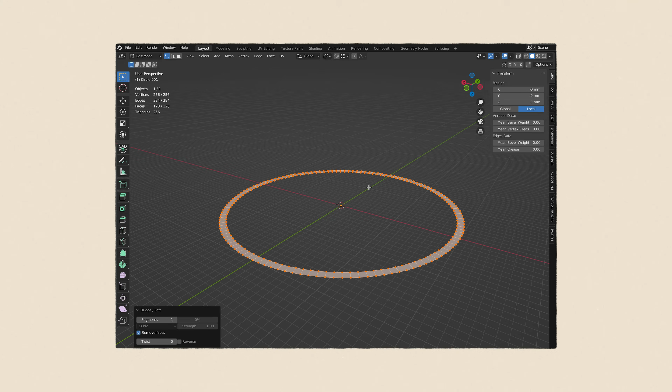Let's get to work. Last week I took a short course on precision modeling in Blender, and I finally started learning how to model things the right way for 3D printing. This time I started over from scratch, but kept the overall structure pretty similar to the first version. To be honest, I didn't use the CAD add-on all that much, probably because I'm still not super confident with it, so I ended up modeling almost everything using Blender's built-in tools.

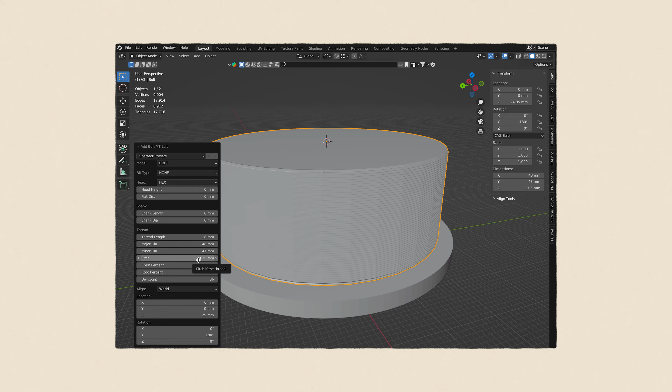I also used the Bolt Factory add-on to remake the threads. This time with a profile that's actually suitable for 3D printing. I fixed the overhang issues by keeping all unsupported angles under 45 degrees. And I added a rotation stop so the adapter doesn't just keep spinning when mounted.

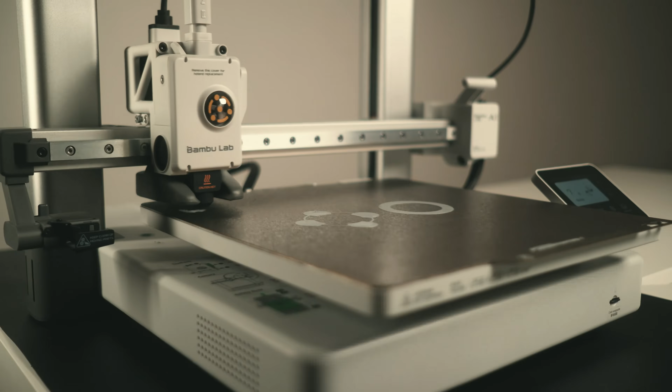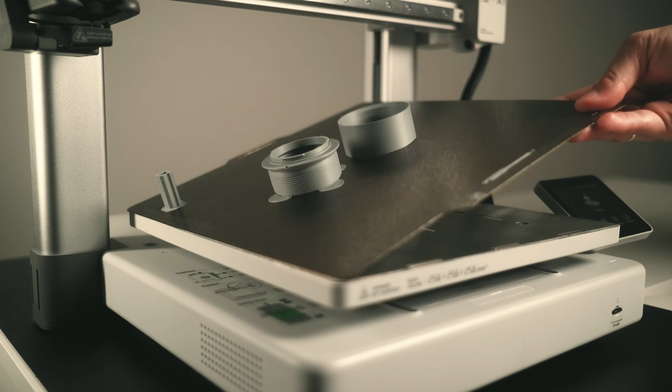The print quality turned out surprisingly great. Fixing the overhangs was easier than I expected. But the rotation stop didn't work. The lens keeps spinning because the notch I designed wasn't deep enough. The little bump it's supposed to catch on couldn't lock in place. So using this adapter is basically impossible.

I did test the focusing distance though, and it's not great. By making the adapter thicker, I accidentally pushed the lens too far from the sensor in its closest position. Now it can't reach infinity focus, though it can focus on objects that are fairly close. For the next version, I'll move the lens as close to the sensor as possible at its nearest position. That way I can find the minimum focusing distance and work from there.

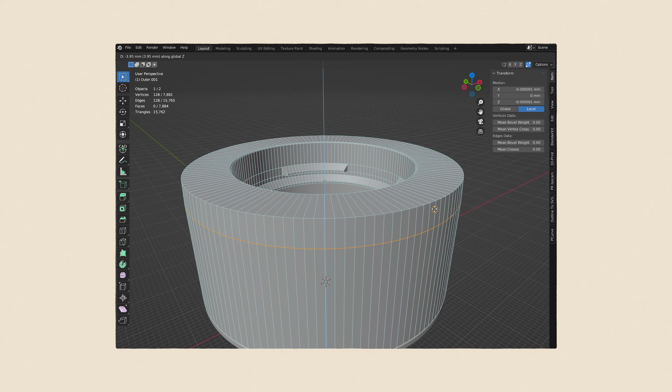Let's do it! This time I didn't need to start completely from scratch, but I did have to strip away all the unnecessary geometry. I removed all the chamfers and deleted the thread. It's much easier to add those details at the end than deal with a dense mesh while making bigger changes. I also moved the lens deeper into the front section of the adapter, so now the front and back parts are aligned at the same level.

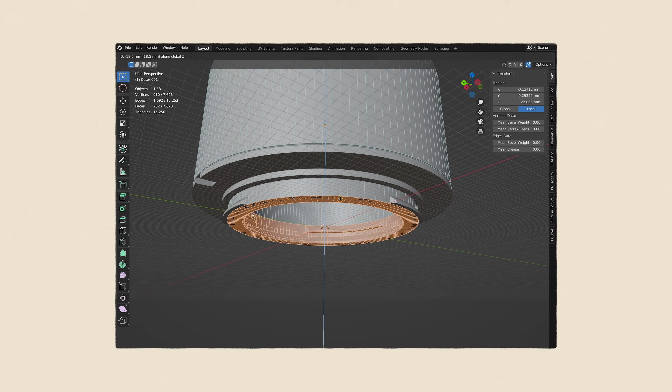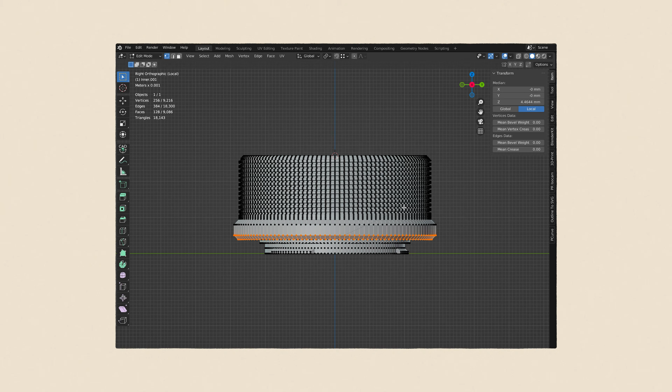To make the front section slide into the back section, I had to thin the walls, which isn't great for 3D printing, but we'll see if it holds up. After that, I re-added the thread, and I had to slightly increase the adapter's overall diameter to make everything fit. Finally, I added the chamfers again, the rotation stop, and a new grip ring to make it easier to handle and adjust the lens manually.

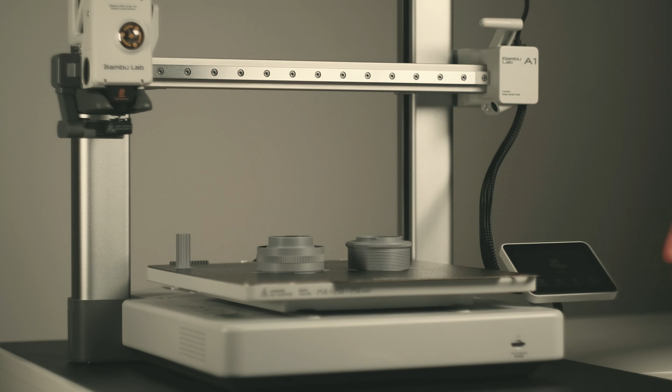Inside the slicer, I added brim ears to both parts of the adapter. In the second version, I only added them to the back section, and the front part ended up with imperfections, because it didn't stick evenly to the build plate. This time I made sure both parts have extra adhesion so they print cleanly and stay in place. Now it really looks like a finished product. With all the chamfers and grip ring details, it actually feels satisfying to hold.

But the print still has some imperfections. I'm guessing that's because of the thin wall thickness. And unfortunately, I didn't hit the focusing range at all. The lens sits way too close to the sensor. But now I can finally measure the exact distance it should be. Since the front part doesn't need to sit that close to the sensor anymore, I can increase the wall thickness again, which should improve print quality. On the bright side, the rotation stop works perfectly this time.

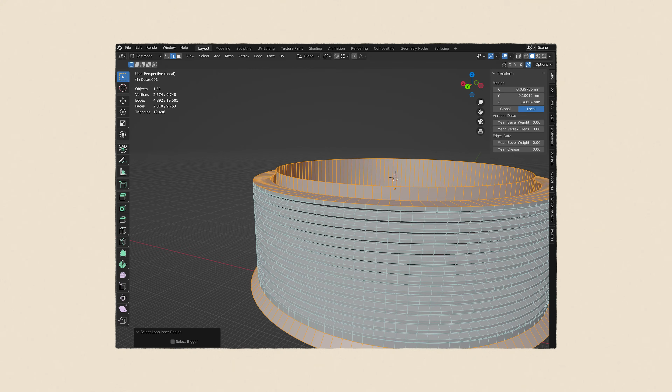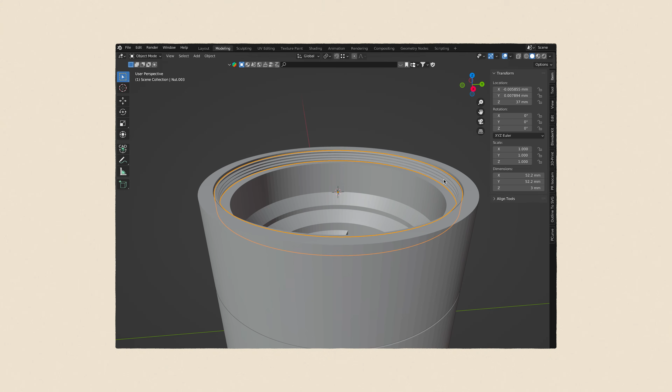So one more round. The process this time was pretty much the same. Remove all the unnecessary elements, increase the wall thickness, increase the adapter thickness, and add a new thread. But during modeling, I decided to add one more thing. You might have noticed that the filter thread on the lens is damaged. Since the lens already sits deep enough inside the adapter, I figured why not add a new thread to the front of the adapter itself. That way I can still use filters with this lens. So that's what I did. Then I added the chamfers and grip ring details again and sent it off to print.

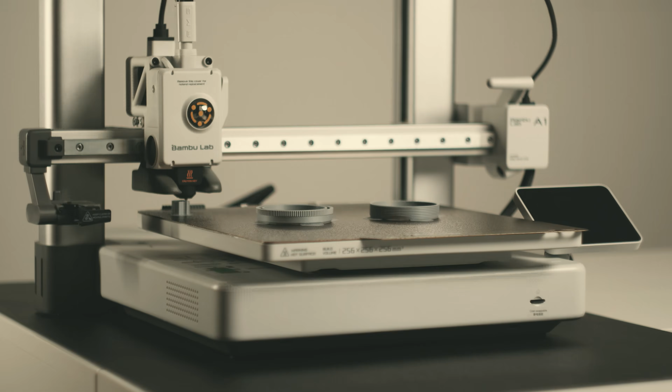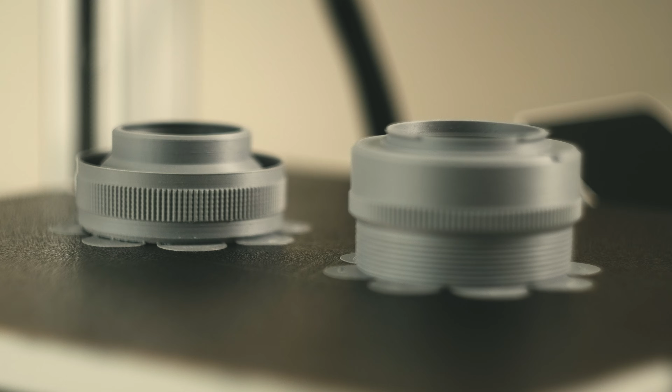Let's start with the good news. The focus works and the rotation stop still works. And that's great. But there were still some printing imperfections. Turns out the wall thickness wasn't the problem. I had increased the adapter's diameter, which meant the 4 brim ears I used before weren't enough to hold it firmly during printing. So I reprinted the exact same model, this time with 8 brim ears on each part. And now it's solid. Everything works and it looks great.